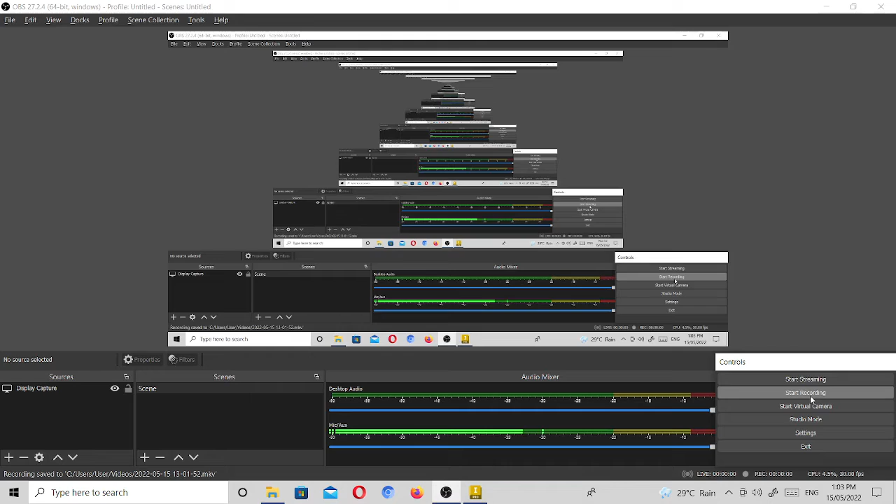Hi, this is the last video in our activity number 3. In this video, I'm gonna assemble the parts that I made earlier.

Let's start. Let's choose assembly, and then we will wait for the environment to load. I guess it's already loaded, so let's start placing the parts. First, I'm gonna place the body.

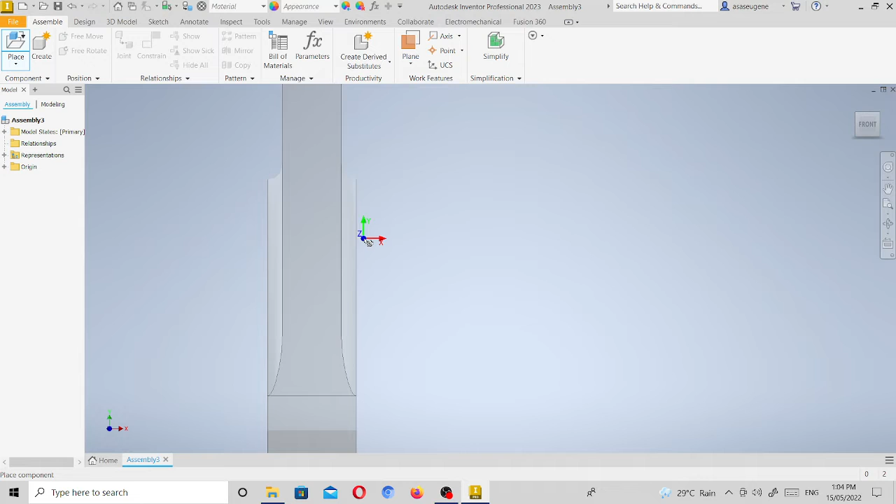Let's click, and click another one because we will assemble these two parts. We will join these parts, so let's use constraint to join these two.

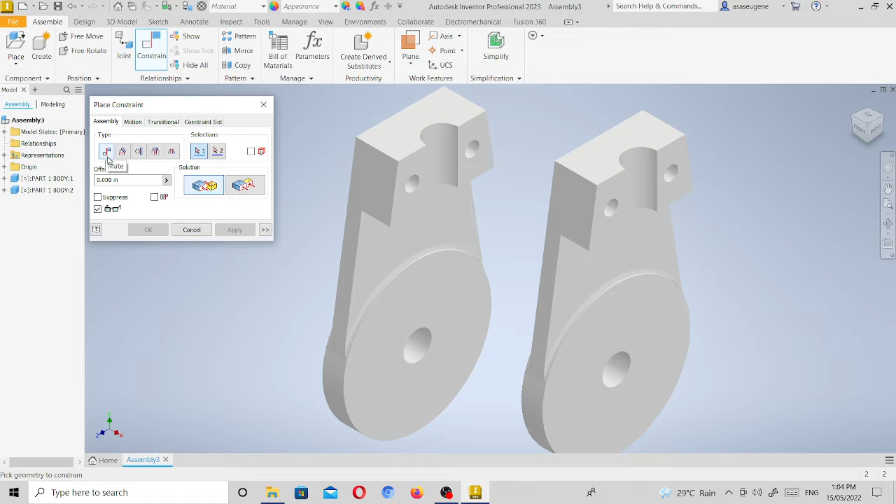The type is mate and the solution is mate. Let's select this face and select this face as well. So now it's attached, but we can see that it's not properly attached yet. Let's apply and use another.

Let's use this flush. Let's select this plane and this plane as well. So now the two planes are coplanar, there are no overlapping edges. Apply, and to make sure let's apply flush here as well.

Now it's done. So let's put the other parts here in our assembly. Let's place the washers for the M8 bolt.

Let's look for the washers here. Open. In this assembly, there are 4 washers to be assembled, so we must click 4 times. Let's just zoom in so we will be able to see clearly when we use the constraints.

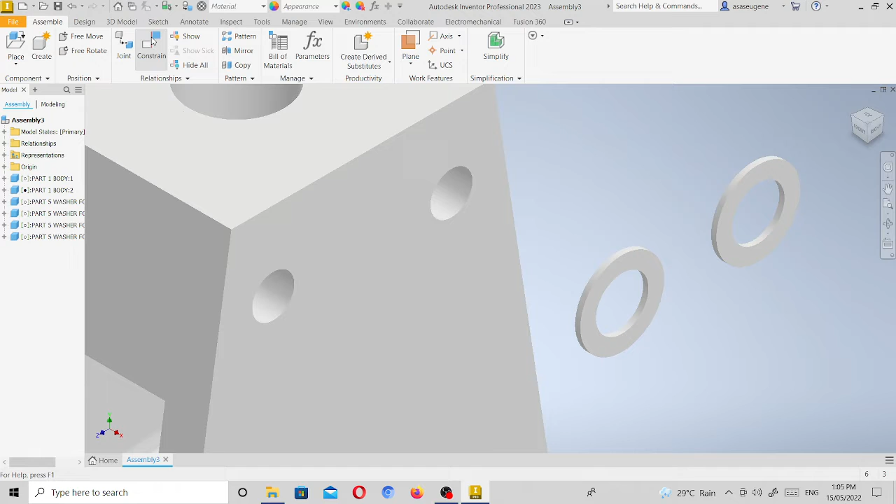Here we will just leave it like that, mate, and then select this and this. Now it's attached, let's apply that. And next we'll also do the same thing in this washer, and then apply.

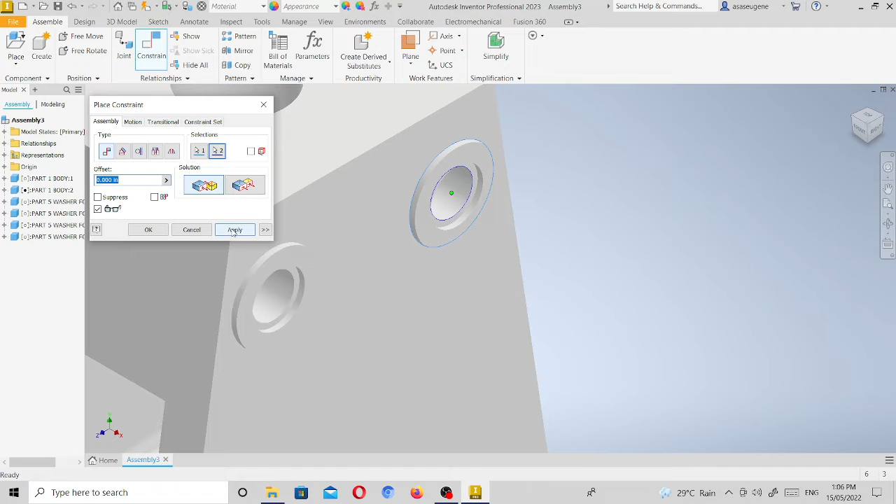Let's just use this orbit to look if it's properly attached now. As we can see, it's good. Now let's move to the other 2 washers.

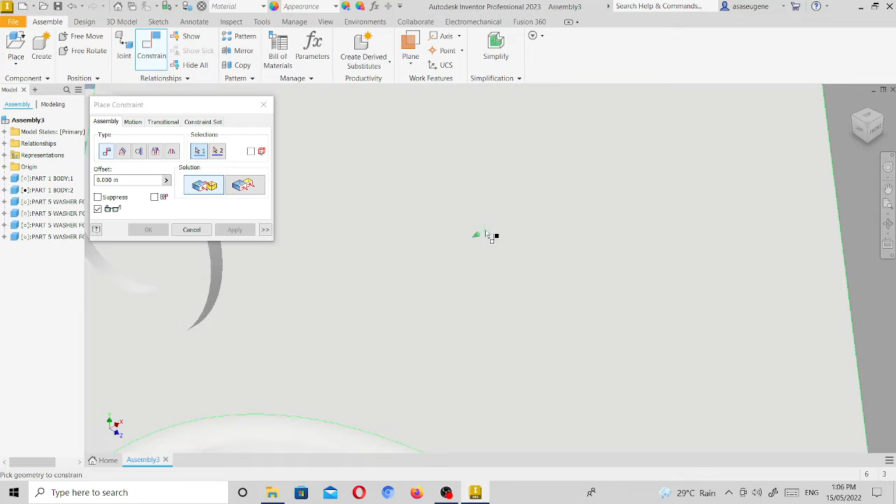Let's zoom in like that, and let's do the same thing we did earlier. Let's select this and select this hole, and after that apply. Then lastly, this washer.

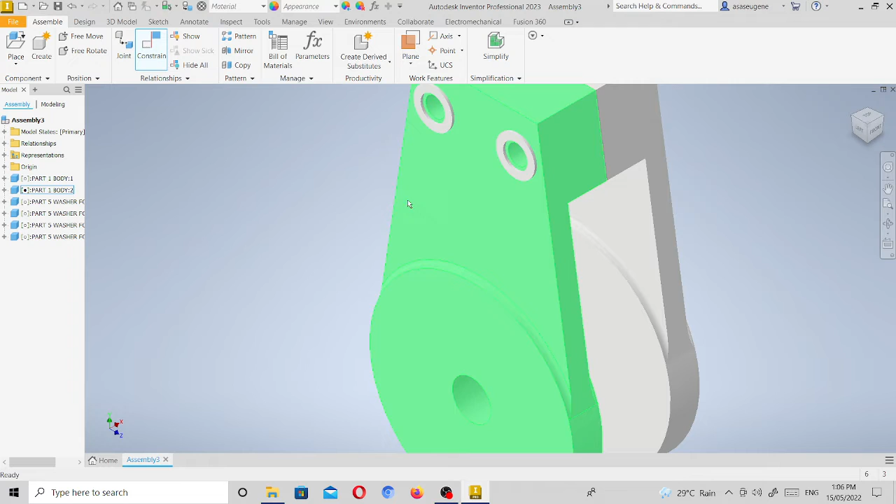And then apply. Now we are done putting the washers. So let's put the last washer for the M12 bolt. Let's look for it, this is the washer for the M12 bolt.

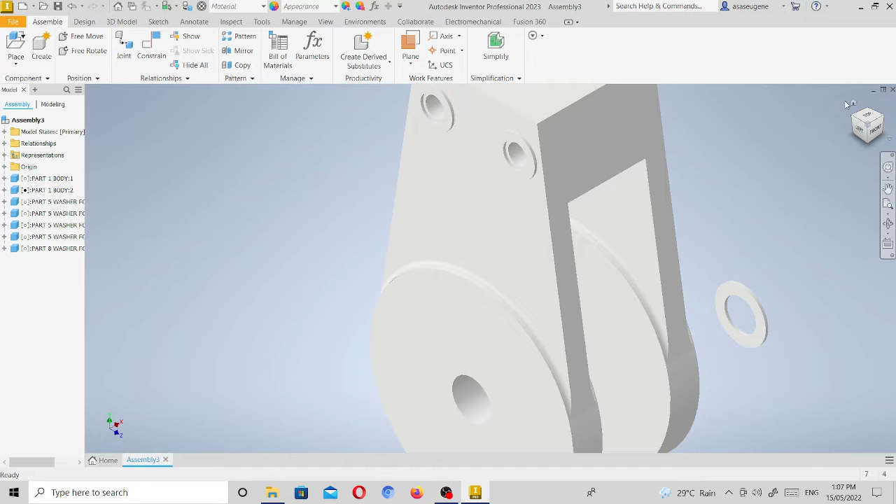Let's just place it there, and then select the home view. Let's try to move this closer and zoom in, and now let's use constraint.

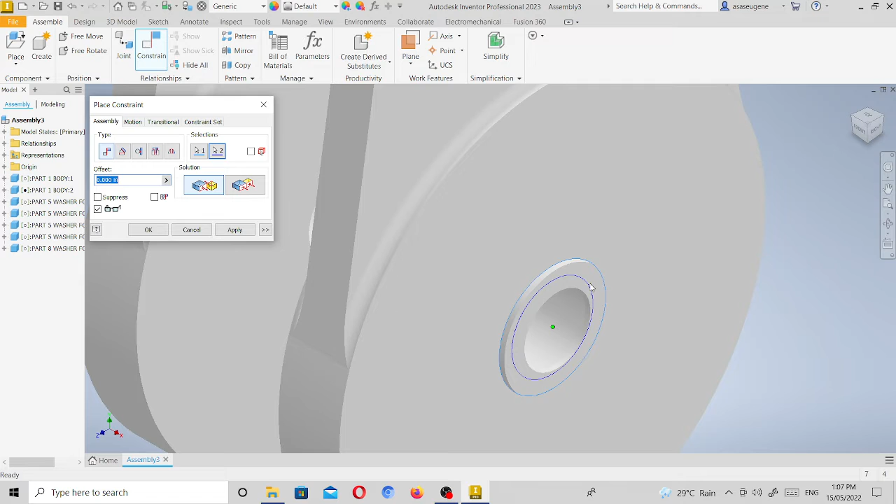Basically we're just gonna use mate again, just like what we did in the earlier washers. Let's select this and this circle, then apply, and then close.

And then home view. So now I'm gonna put the bolts in these holes, the M8 bolts here and then the M12 bolt. Let's place the M8 bolts first.

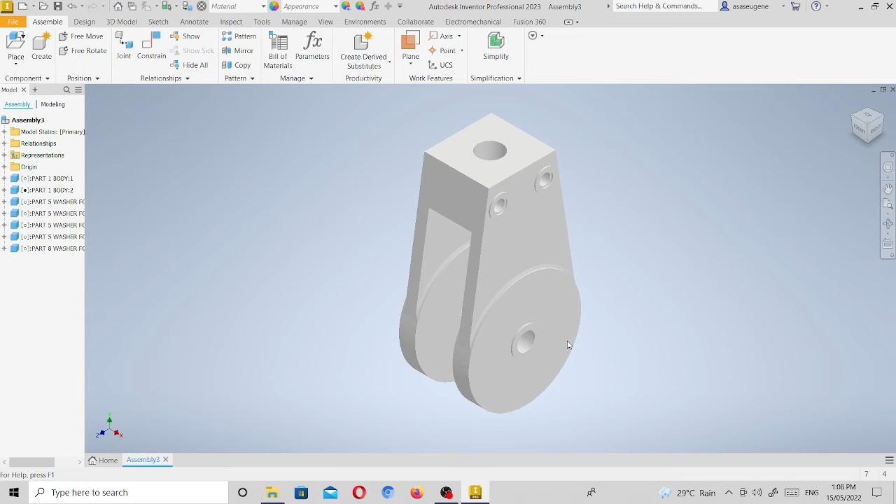This is the M8 bolt named as securing bolt. We will need 2 bolts here, so we need to click 2 times to place 2 bolts in the assembly area.

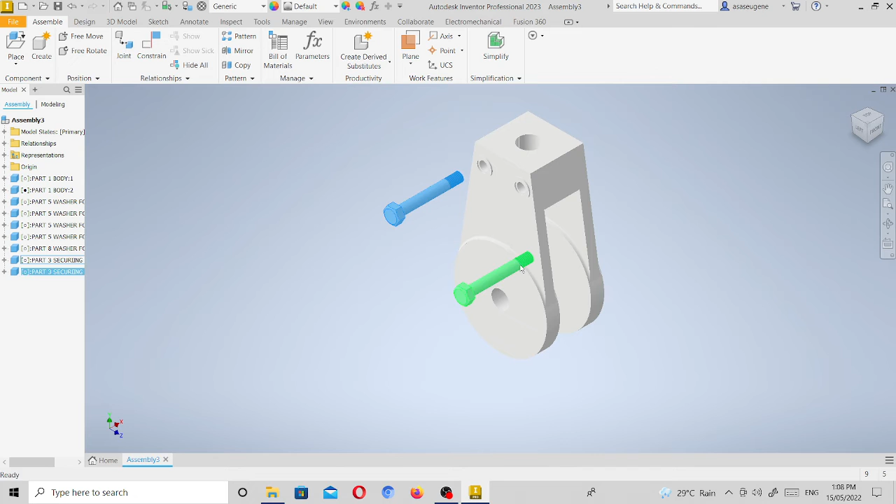After that, let's look for a better view so it will be easier for us to assemble. Let's move this closer to the hole, and let's zoom in.

I'm using a new mouse right now, so it will be easier to zoom in, zoom out, to drag, and I found out that it will be a lot easier if the middle button is used. Fortunately, I have a better mouse now.

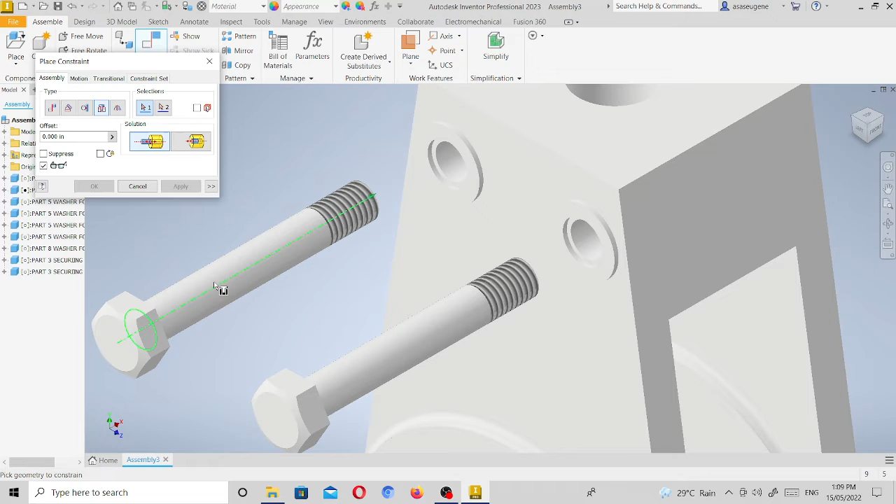So here we will use the insert. The type is insert and the solution is opposed. To insert these bolts into this hole, let's click this first, like that, and then select this. Now it is inserted.

Let's apply. We will do the same thing in this bolt. Let's select it like that, select this, and then apply. We're done with that. Let's select home view and look if it's properly placed.

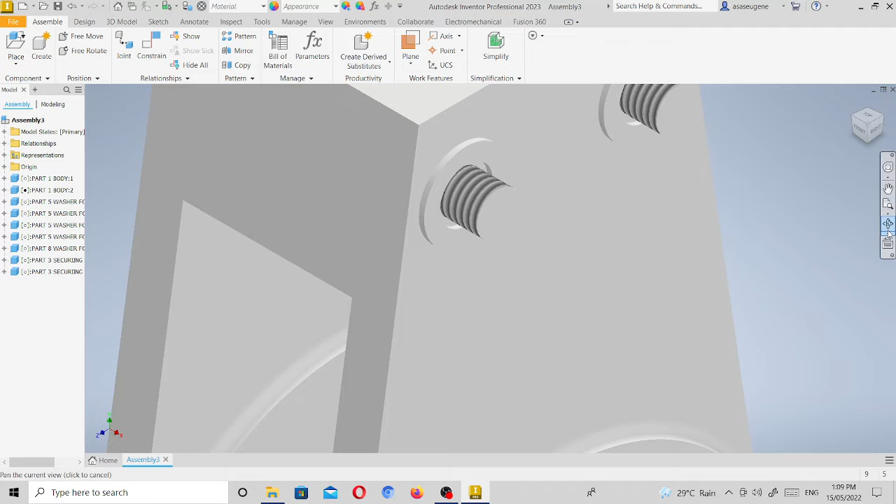Let's look around. So it's good. Now let's put the M12 bolt here in this hole.

Let's place that. Here it is named bolt axle. Let's open that and place that in here.

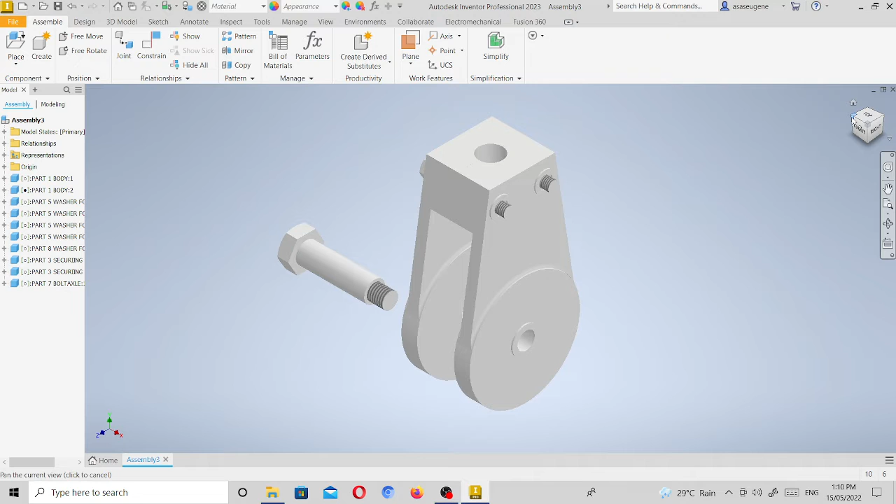Let's select another view again, and let's move this closer to the hole, and then zoom in.

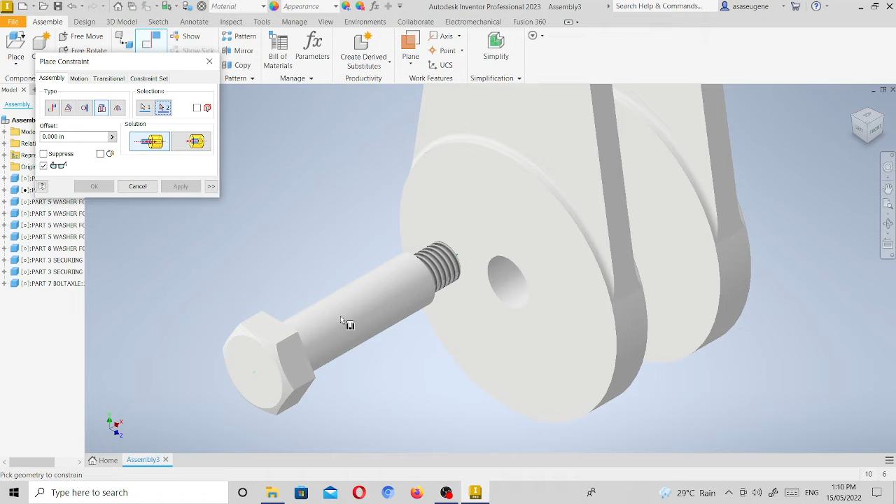So now we will just basically do the same thing we did on the earlier two bolts. Let's select the insert, the solution is opposed, and select this bolt and this circle, and then apply. Let's close that and let's look. As we can see, it is properly placed and inserted in the hole.

Okay, now it's done. So after that, we're gonna put the two bolts here, the two M8 bolts and an M12 bolt here. Let's place the M8 bolts.

Let's look for the bolts - no, the nuts rather. We will gonna put the nuts here and here as well. So let's put the nuts closer to the bolts.

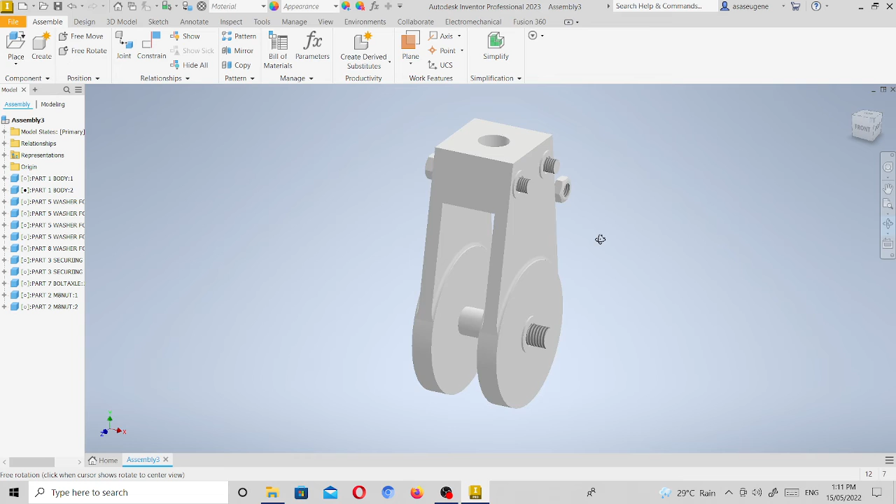So let's orbit this. Let's move these nuts first closer to the bolt, and then let's select the home view and try to drag the nuts closer to the bolts.

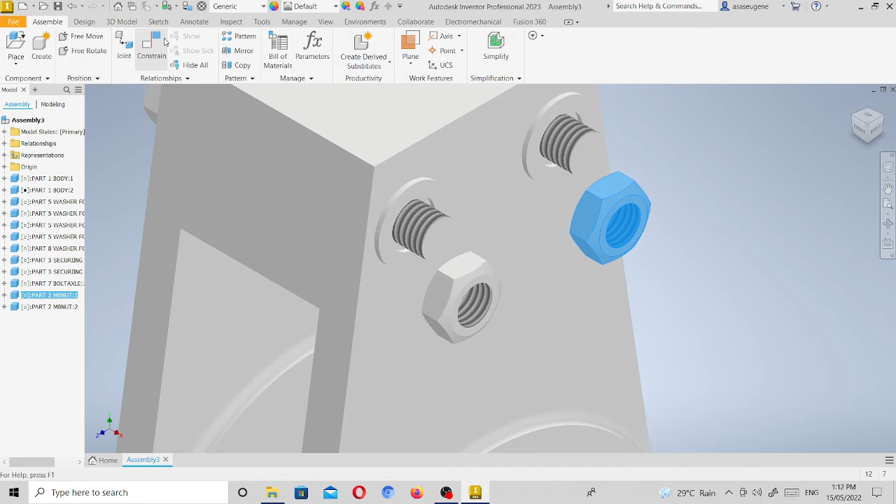So now we are gonna insert these nuts into these bolts. Let's use constraint again, we'll just use mate. We need to use the orbit here to look for a good view.

Let's move this first. No, let's move this first. And now let's insert that into the bolts. Let's try to look for the circle.

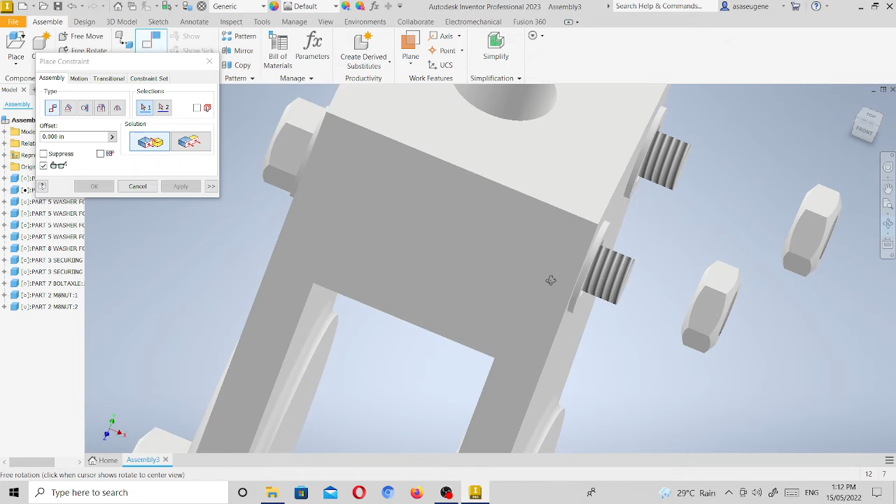Let's try to rotate this first to show the edges, and this as well. Now let's try to apply the constraint. So as we can see, it did not go as planned.

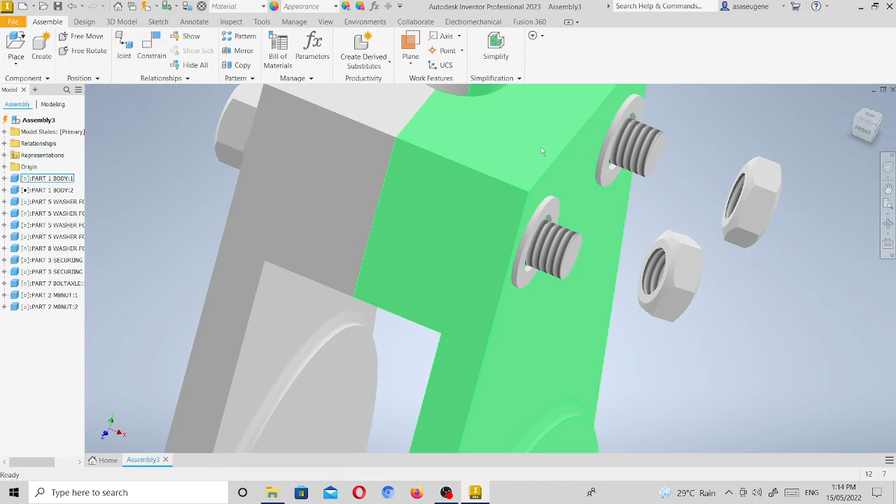So let's try again. We need to properly choose the edges that we're going to select so that we will be successful in putting the nuts.

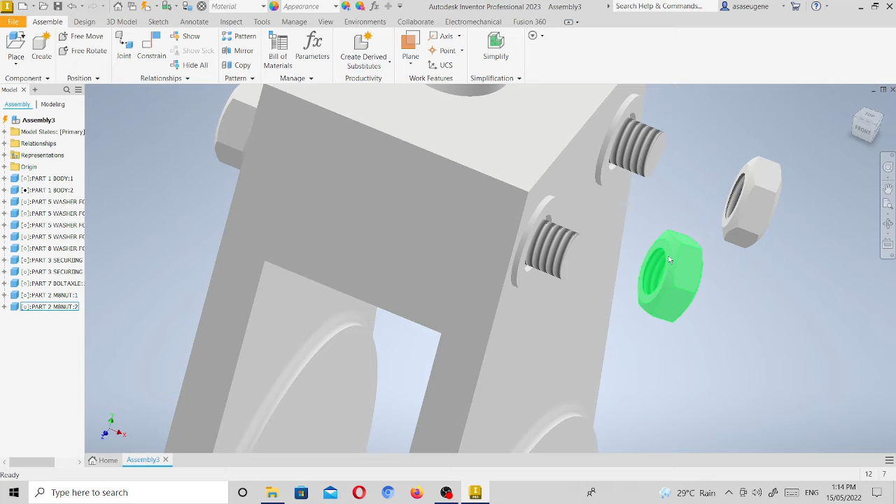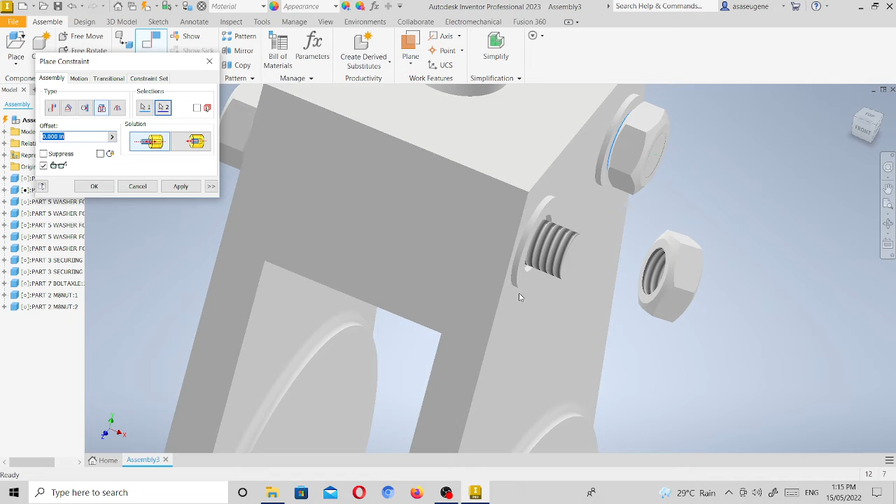That's the mistake there - we must use insert first. Okay, so it's now inserted. I forgot to click insert first, that's why we encountered a problem there.

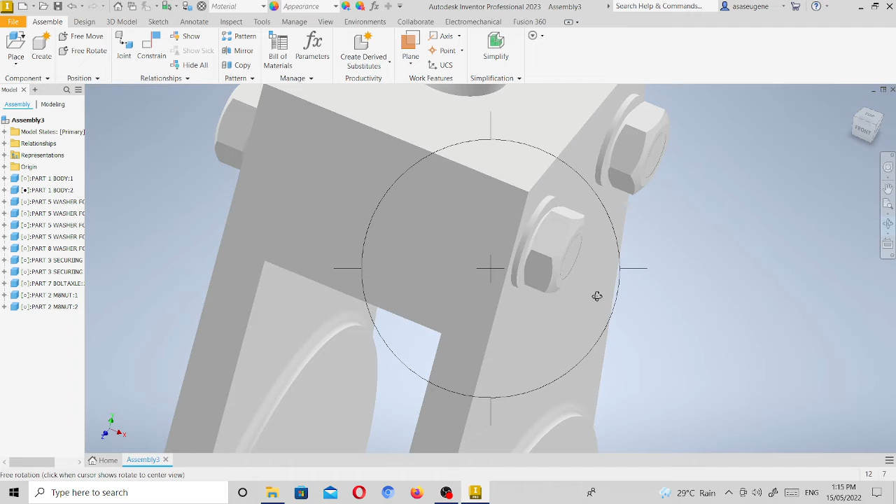But now, you can see that we fixed the problem. Let's try to look if it's placed properly. So as we can see here, it's placed properly.

Next thing is to put the M12 nut here. So let's place the nut. Let's open that and place that in there.

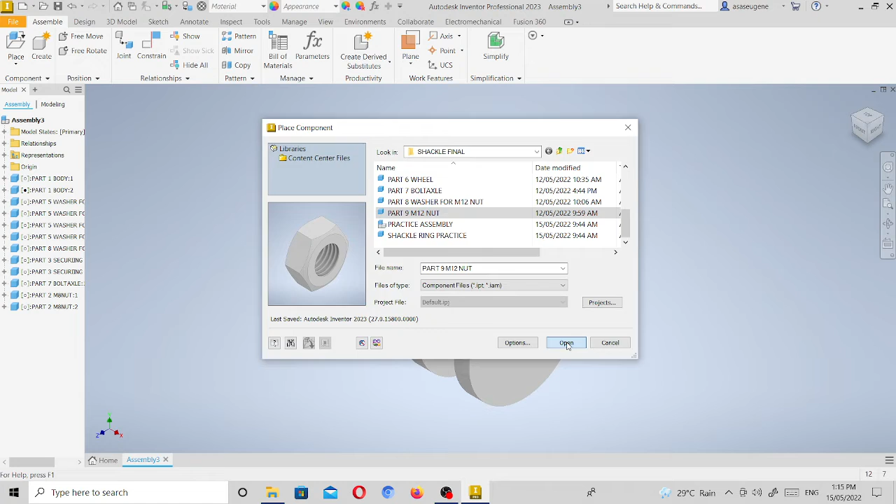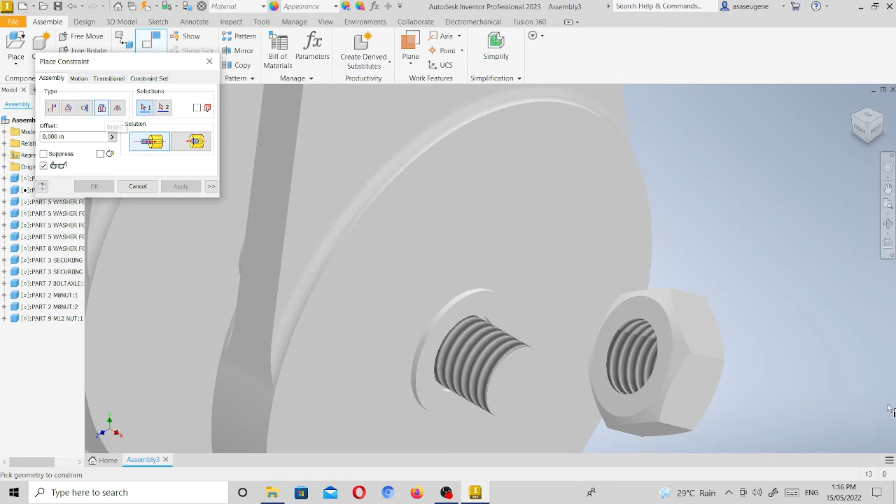Let's zoom in and try to rotate this nut to reveal its edges so it's easier for us to constrain. Now let's use the insert, select this and this, then apply and close the dialog box.

Let's try to look around it. So as we can see, it is perfectly inserted in the bolt. Let's click OK and then home.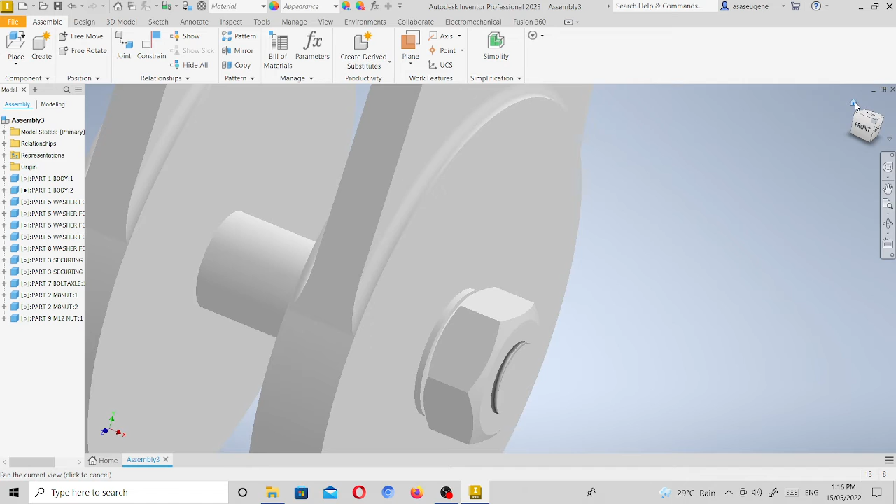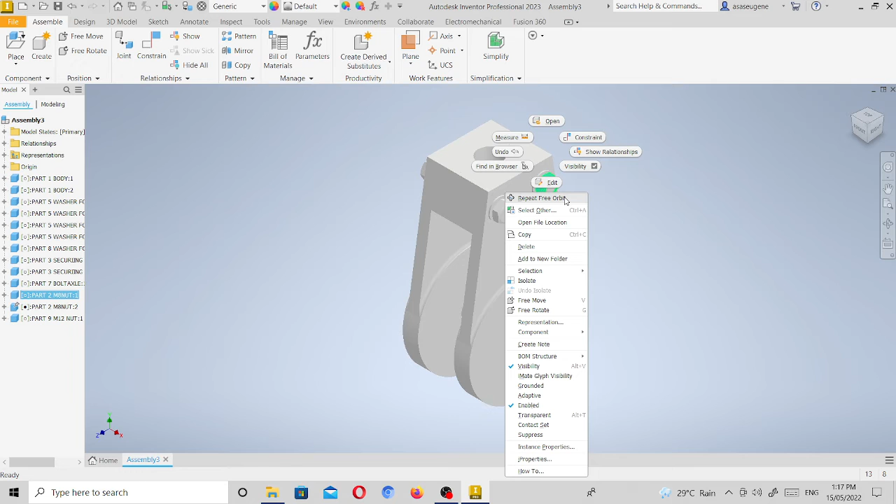There are last two parts that are going to be assembled in this, but before that, let's try to ground this first. The reason why we would ground these parts is in order for them not to be accidentally moved when we are trying to assemble another part.

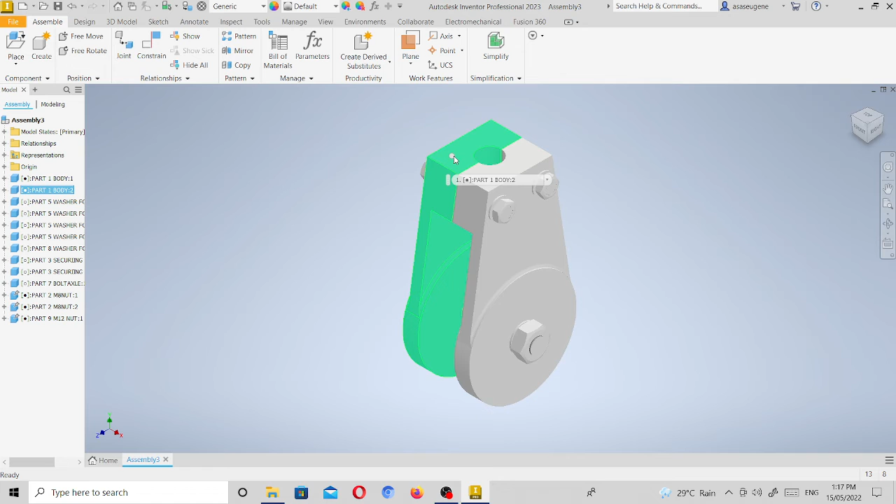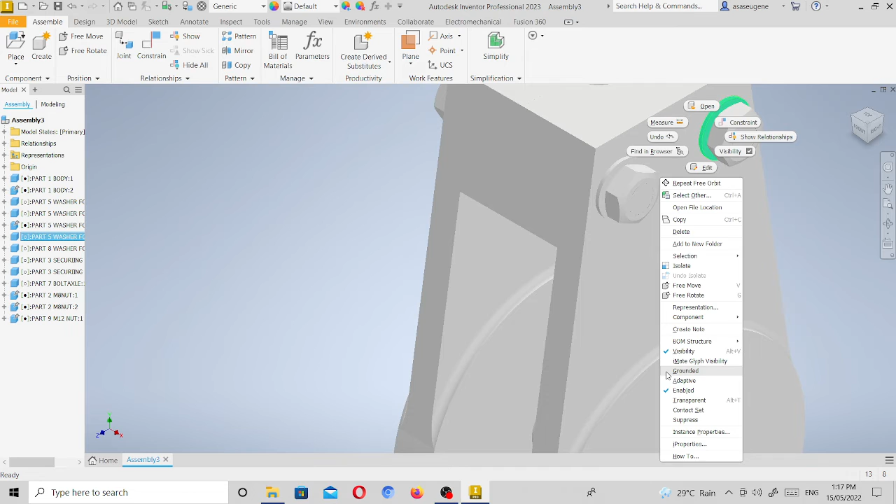It would be very hassle for us, and it would also affect the entire process, because if something is moved out of place, you have to place it again correctly, and we don't want that to happen because it will cost us more effort and waste time.

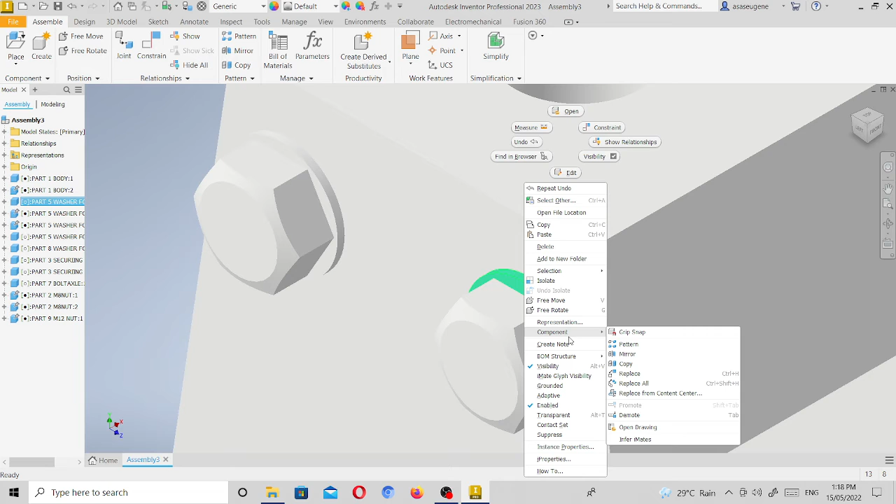So let's try to ground the other parts as well, and ground the remaining parts so that we are sure they will not move out of place.

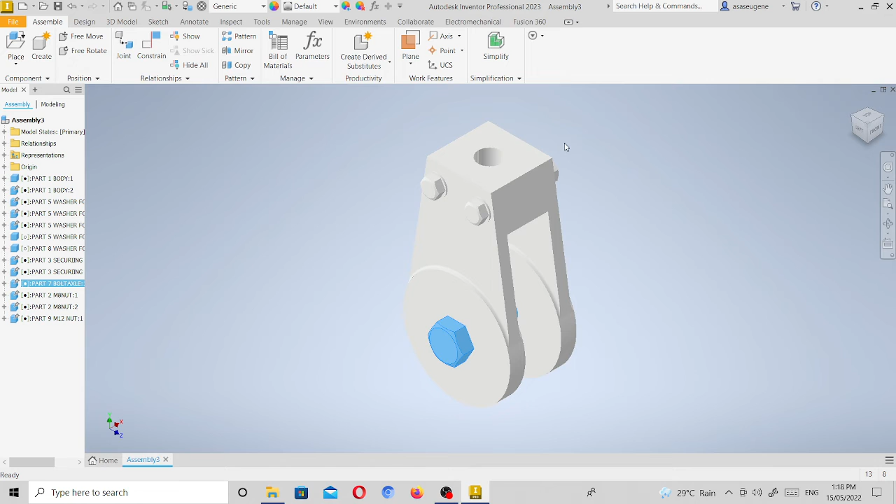It's just to make sure that when we try to edit something new or assemble another part, it would be already unmovable, and therefore we will not encounter a problem.

So the last parts that we're going to assemble here are the shackle ring and the wheel - the shackle ring and the wheel to be inserted into this bolt axle. So let's place the wheel first.

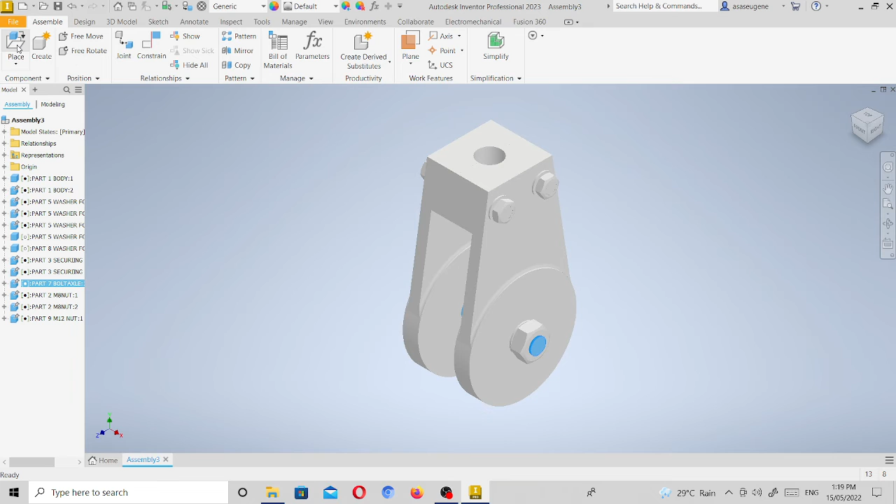Let's look for the wheel. So the wheel is here, let's open that and put that in there. Let's just rotate this wheel first so that it will be easier for us.

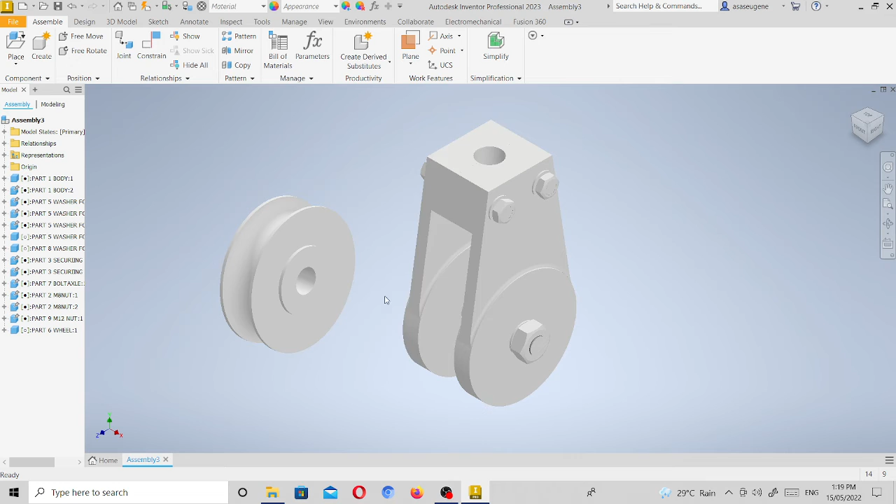Just like that. Now let's select this view - no. Let's select joint. Let's look for the center point, and the center point of here as well, and let's see what would happen.

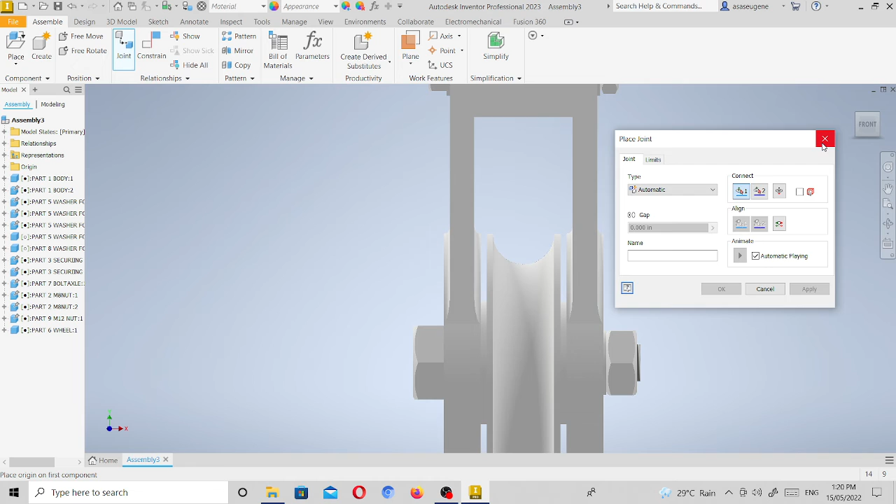So now it is perfectly inserted in the bolt axle with even spaces from this side to this side. It is a very amazing tool, and don't forget to apply, then close the dialog box.

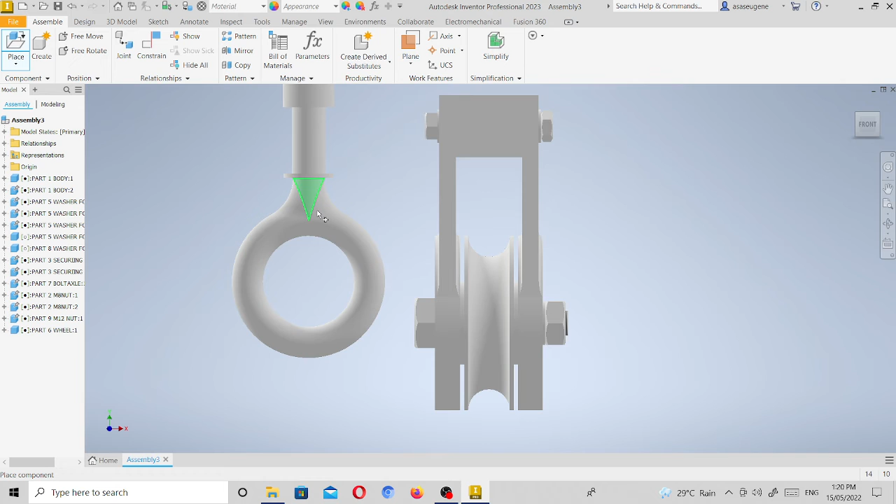After that, let's put the shackle ring there. So let's place the shackle ring - this is the last part to be assembled. Let's just put it there first, and let's ground this wheel as well.

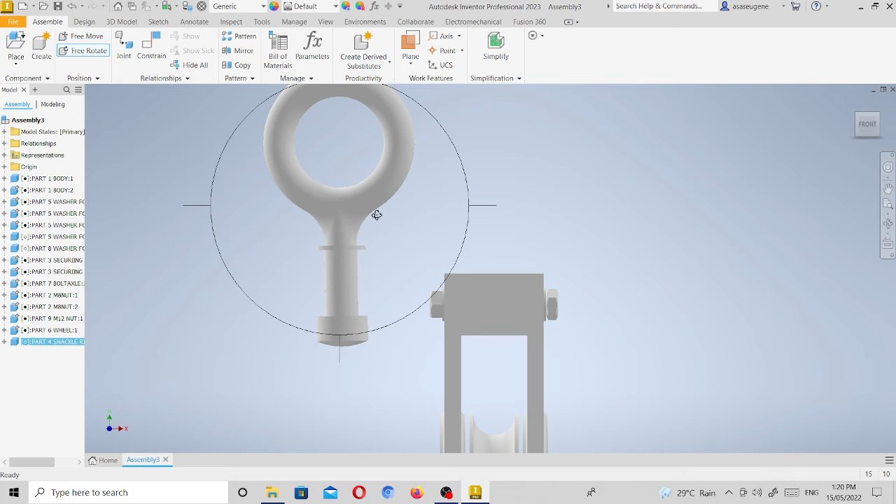Let's try to move this part over here, and let's free rotate this one so that the orientation is easier for us to move.

Let's just move that there as well, and let's try to use the free orbit in order to look for a very good view. So let's move this ring a bit.

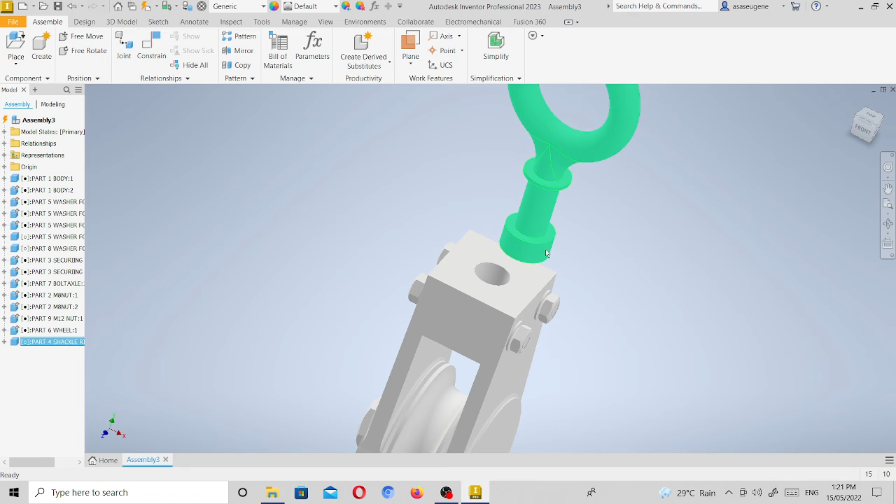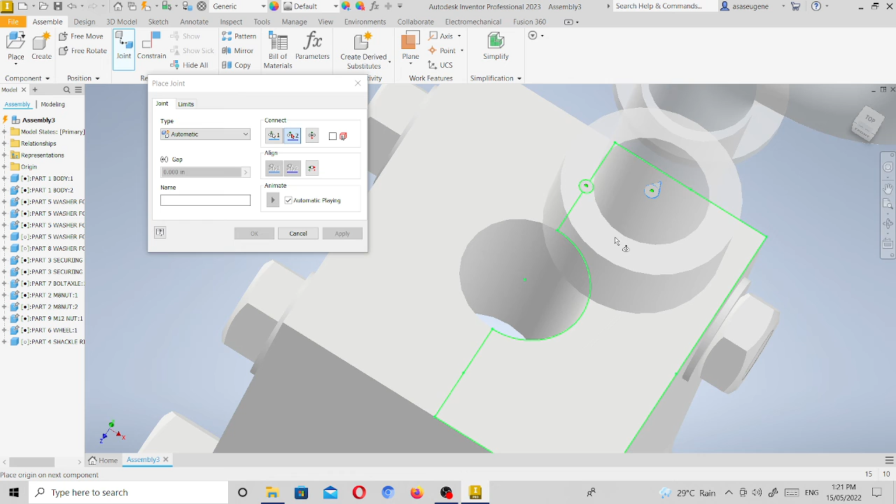Okay, there. Let's try to reveal the edge of that part. Let's zoom in - here we will use the joint, select the joint, and select this edge to be joined on this edge.

Let's wait to see what would happen, then let's apply and close the dialog box. Then let's select the home view.

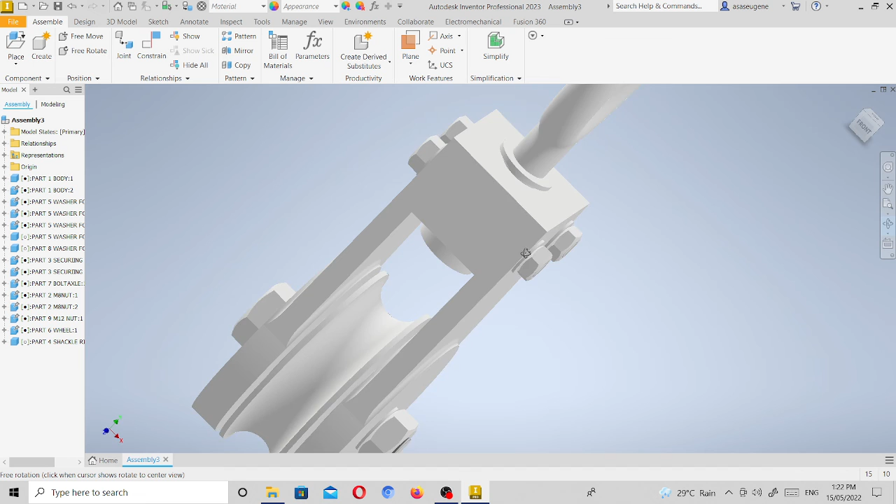In here, let's look around and try to see if everything is placed accordingly into their correct places.

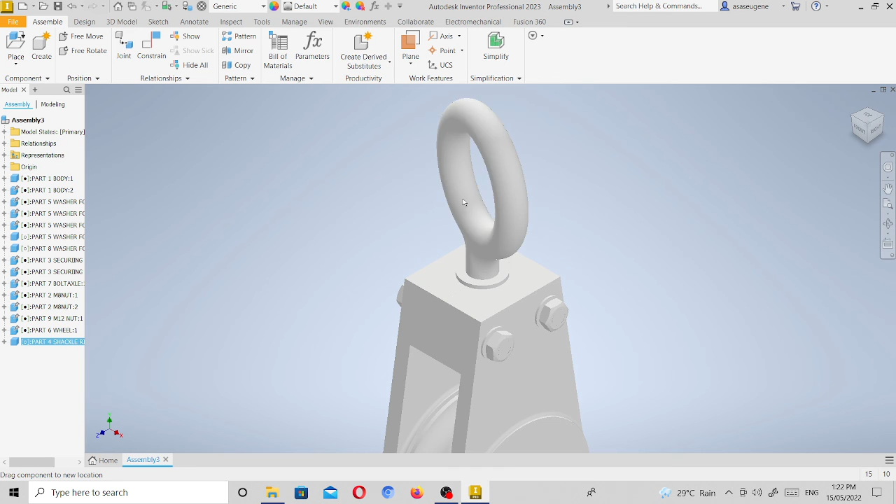Now it's already done, let's try to move this. So as we can see, it is rotated like that. We will not ground this because its purpose is to keep rotating, because in actuality this part is used to allow rotation in both directions, and then a rope is to be put there.

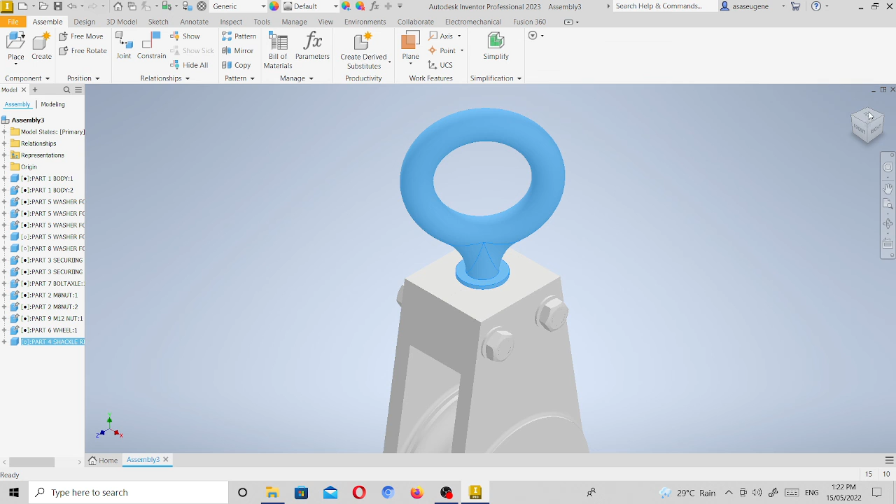So now we are already done with assembling. Thank you, sir, for watching this video and my other videos as well.